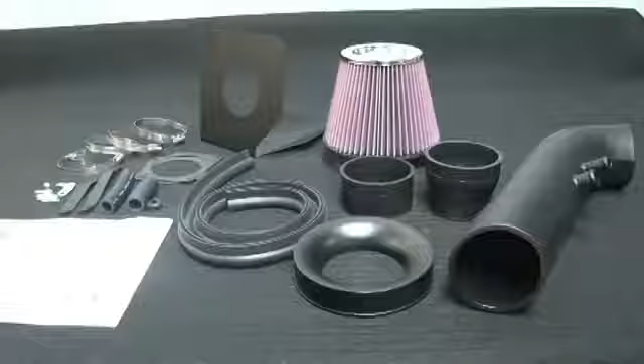This K&N air intake system is designed to increase vehicle power and acceleration by reducing restriction in the intake path.

The 57-2519-3 air intake has received a CARB EO number and it is street legal in all 50 states. This air intake system fits 1996 through 2004 Ford Mustang models with 4.6-liter engines.

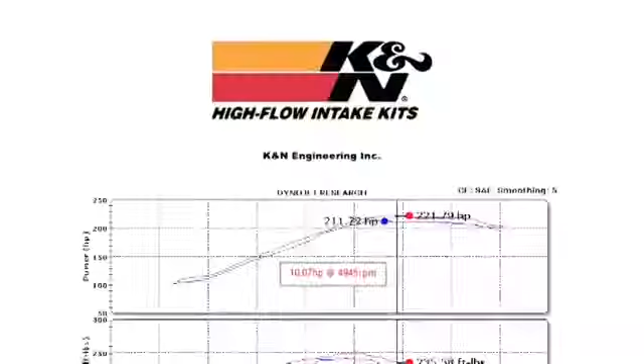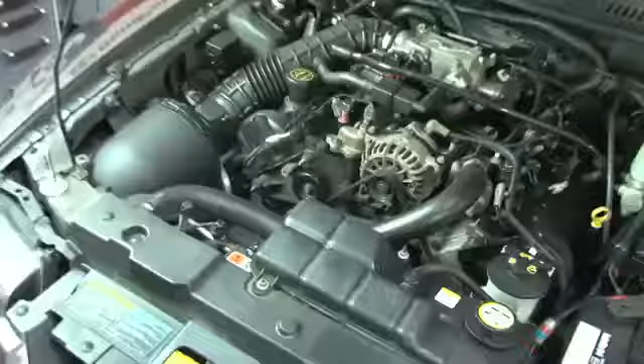K&N power testing showed an estimated power gain of 10 horsepower at 4,945 RPM, with this air intake installed on a 1999 Ford Mustang with a 4.6-liter engine. Actual results will vary depending on the condition of the vehicle, mileage, weather, and other variables.

With the air intake installed, we ran the vehicle on the dyno to test the sound comparison versus the stock intake.

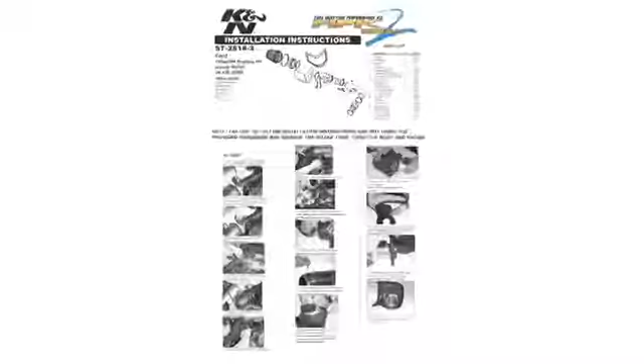The intake kit includes components that have been designed or matched to the needs of these vehicles to produce a safe horsepower increase. Detailed installation instructions are included with this kit.

The tools needed for this install are shown. Turn the ignition off and disconnect the vehicle's negative battery cable.

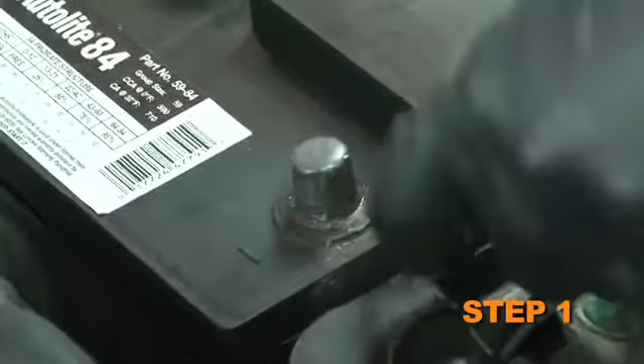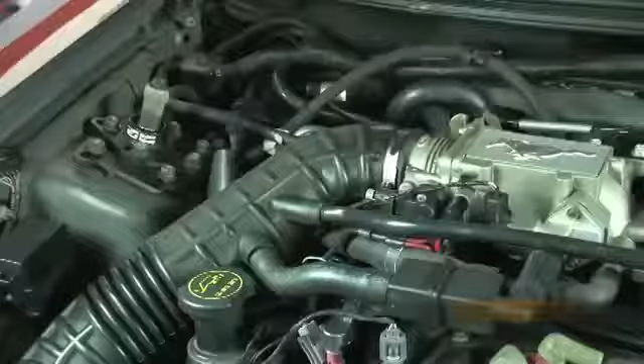On models equipped with an external air temp sensor, disconnect the air temp sensor electrical connection. Disconnect the mass air sensor electrical connection. Loosen the hose clamp on the intake tube at the throttle body. Loosen and remove the bolt that retains the air cleaner.

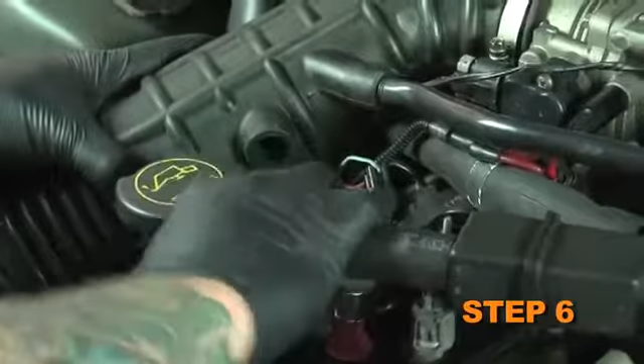Detach the IAC line from the intake tube. Detach the PCV line from the intake tube. Remove the entire air intake assembly.

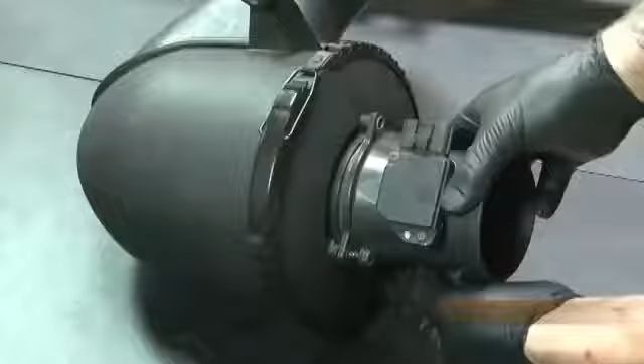Loosen the hose clamp and detach the intake tube from the mass air sensor. On models equipped with an external air temp sensor, remove the air temperature sensor from the intake tube. Loosen and remove the 4 nuts that retain the mass air sensor. Remove the mass air sensor from the air cleaner.

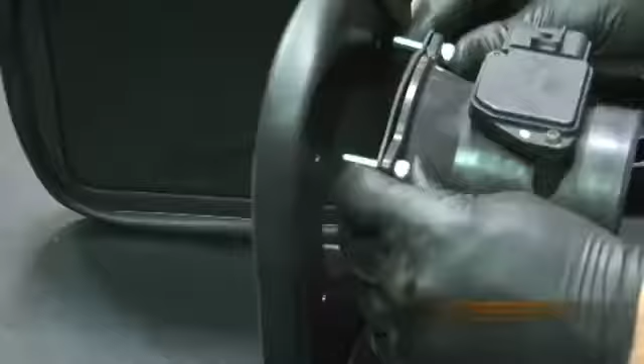Install the trim seal onto the heat shield. Some cutting and trimming will be necessary to achieve the best fit. Assemble the mass air sensor, heat shield, and adapter using the gaskets and hardware provided. Attach the brackets to the mass air sensor.

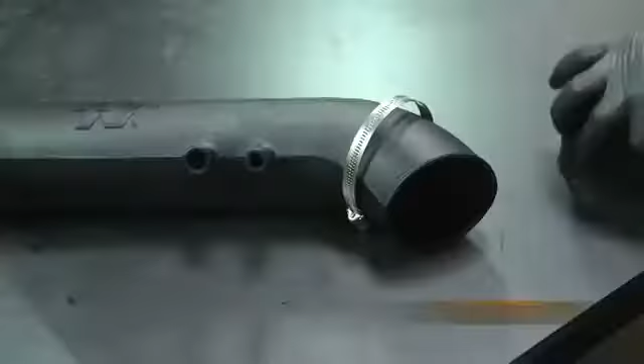Attach the silicone step hose to the K&N intake tube using the hose clamp provided. Attach the silicone straight hose to the K&N intake tube using the hose clamp provided.

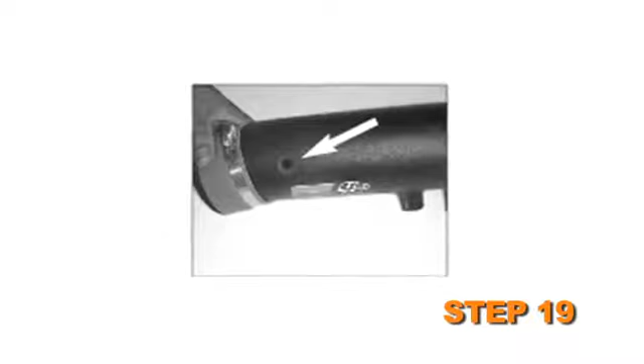On models equipped with an external air temp sensor, drill out the drill point using an 11/16 drill bit. Install the grommet into the hole from the previous step. Insert the air temperature sensor into the grommet.

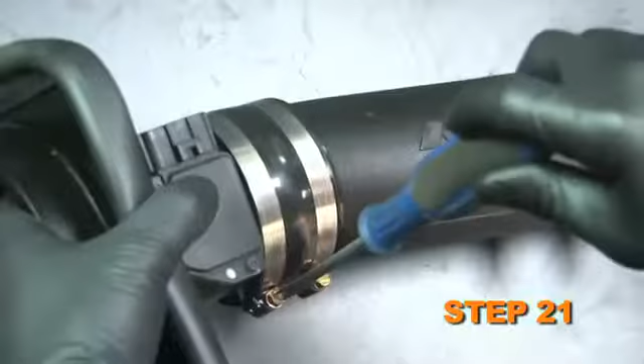Attach the K&N intake tube to the flange on the mass air sensor using the hose clamp provided, but do not tighten completely at this time. Attach the air filter element to the adapter using the hose clamp provided.

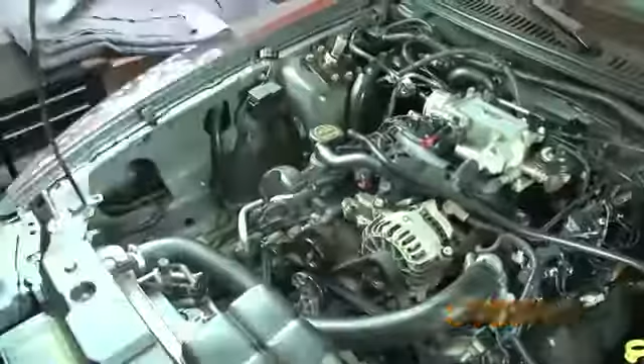Loosen and remove the nut from the protruding stud on the engine if one is present. Install the K&N intake assembly, sliding the brackets onto the protruding stud on the engine. Secure the silicone step hose to the throttle body using the hose clamp provided. Secure the brackets to the protruding stud using the hardware provided.

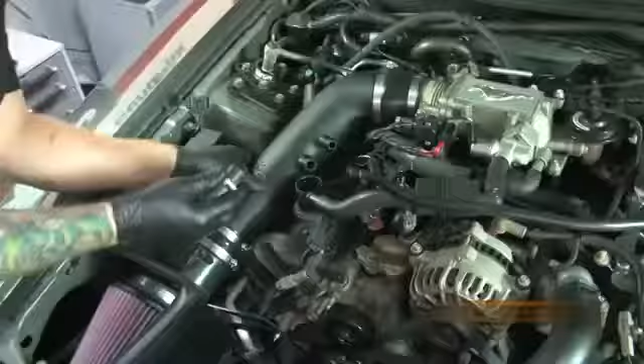Attach the 5/8 inch and 3/4 inch inside diameter vent hose provided onto the appropriate vent fittings on the intake tube using the hose clamps provided. Install the PCV line onto the 3/4 inch inside diameter vent hose. Install the IAC line into the 5/8 inch inside diameter vent hose.

Reconnect the mass air sensor electrical connection and the air temperature sensor electrical connection if the vehicle was equipped with one. Reconnect the vehicle's negative battery cable. Double check to make sure everything is tight and properly positioned before starting the vehicle.

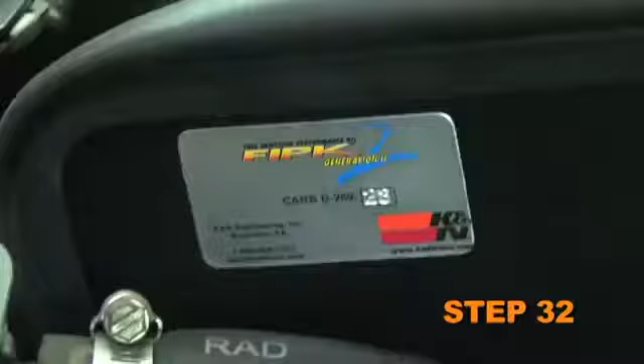The included CARB exemption sticker must be visible under the hood so that an emissions inspector can see it when the vehicle is required to be tested for emissions.

It will be necessary for all K&N high-flow air intake systems to be checked periodically for realignment, clearance, and tightening of all connections. Failure to follow the above instructions or proper maintenance may void warranty.